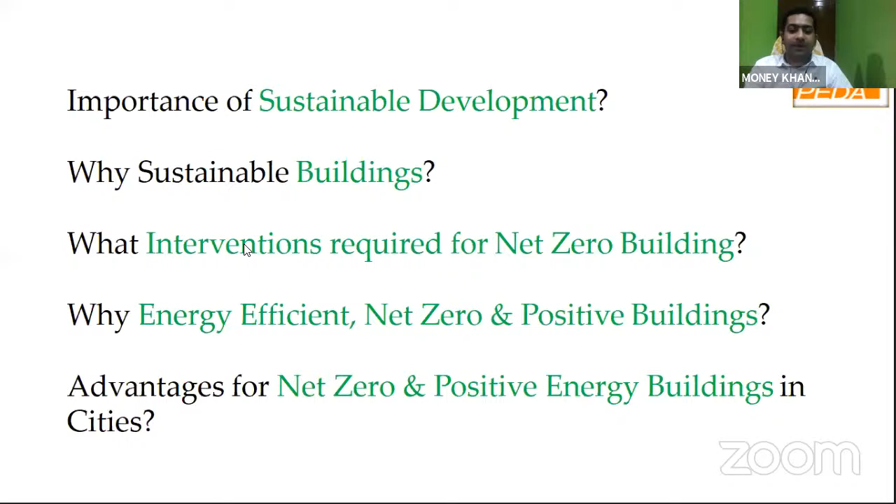So before directly jumping into the topic, I would like to briefly touch upon some facts which we all must be aware of.

So these are some of the facts, the impacts of global warming. We are seeing how the climate is changing, how global warming is impacting and creating impact to the environment. Another is the rising sea level, how coastal flooding is coming up, and the frequent severe storms, especially during summertime, that are impacting our environment.

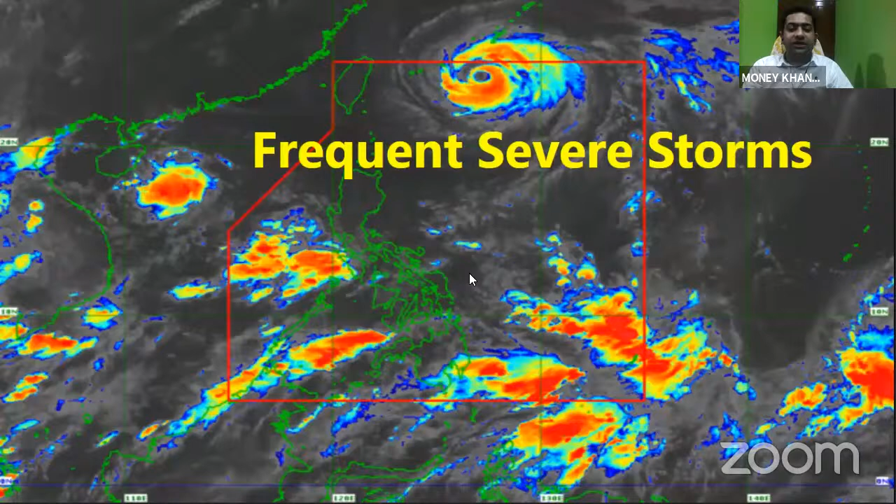Another is the melting glaciers. The glaciers are melting these days, and this is well accepted news which has been floated by many news channels during the winter season, in January or February, where we are seeing the glaciers melting at that time, and how it is very critical and creating impact to the environment.

Another, let me just pinpoint. People are saying your voice is slightly less audible, there is some disturbance, so can you please raise your voice for a while? I am sure that could be right now. Is it correct? Is it audible to you completely now?

Yeah, okay, so basically unprecedented snowfall is another major impact to the environment. In areas where we haven't seen snowfall in the last 10, 5, or 15 years, like in Mussoorie or areas like Kasauli, in the lower part of the area where we haven't seen it, we can see how things are changing and how unprecedented snowfall has occurred in recent times.

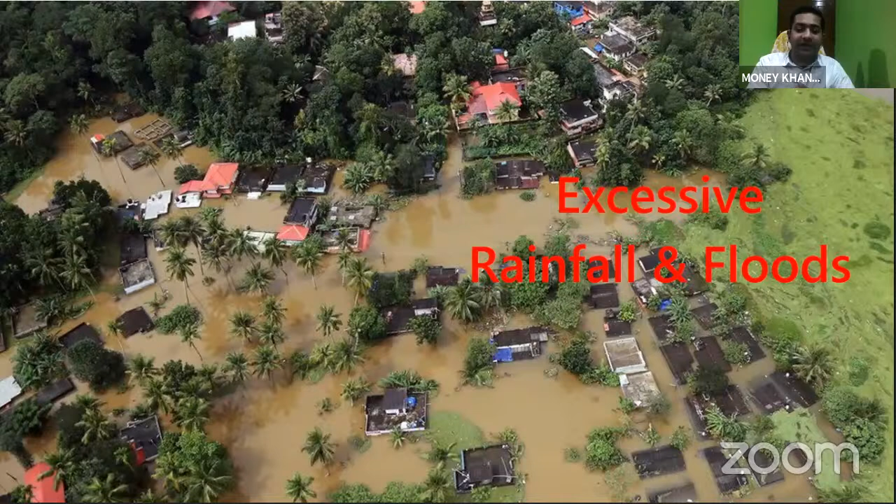Yeah, another is the burning of crops. I'm sure you all have seen the news about the Haryana and Punjab areas, where crops are being burned, and how it's creating a bad impact to the environment.

So another is... there's no voice, so there's a message. I'm sure now the voice is clear. Yeah. Maybe I can switch off the video so that it attaches better.

Okay, so majorly, destructive wildfires as well. This is another situation creating bad impact to the environment, because of what we are doing, what we are destroying - our natural land, natural areas. We are cutting our trees, and creating something bad for the environment.

Another is pollution from thermal power plants. There is another environmental impact, the pollution created by thermal power plants from where power is being generated. We are majorly dependent on these thermal power plants, generating about 70% of all our resources through them.

Another is the burning of waste and crackers. We can see how waste and crackers are burned during the Diwali season. We all know we circulate messages like 'go green, celebrate green Diwali, and no use of crackers' - so this burning of waste and crackers is creating bad impact to the environment.

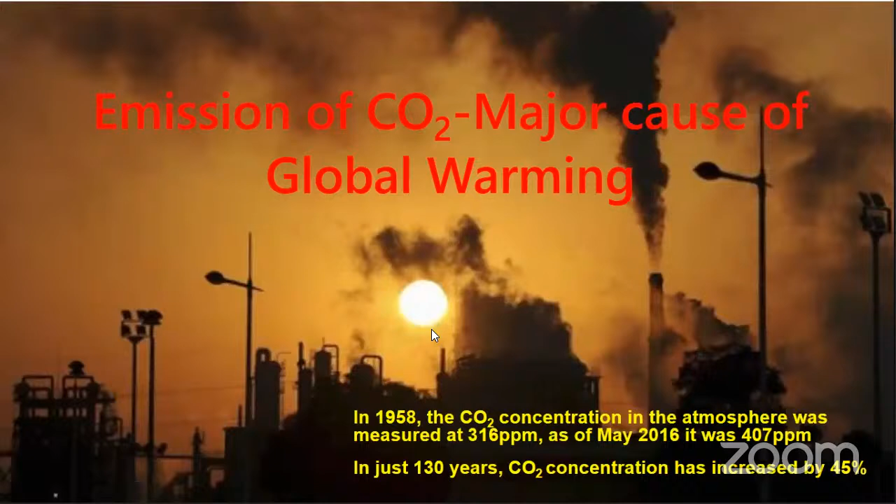Another major challenge these days is air pollution. You can see Kanpur and Delhi among the 15 worst cities in India, and Mumbai being the fourth most polluted mega city. That study considered PM 2.5 and PM 10 levels.

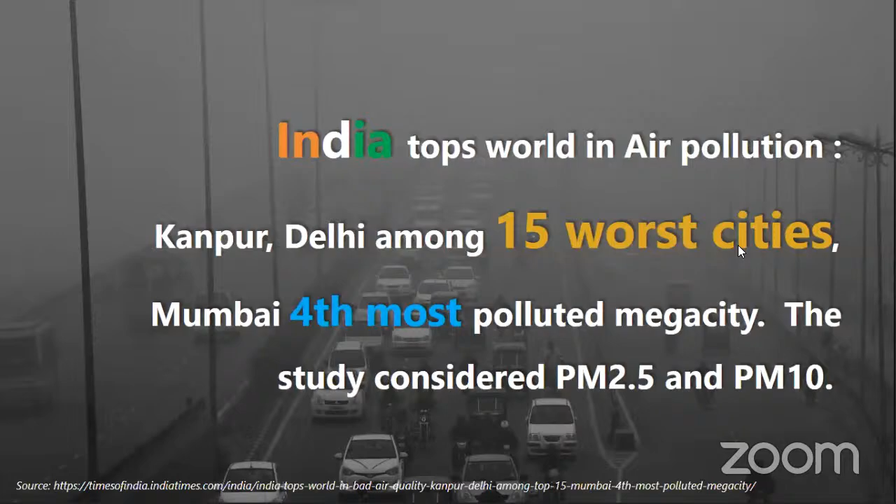So these are the cities - Mumbai being the fourth most polluted, and Delhi among the 15 worst cities in India for top air pollution. This is a study considered by the Times of India.

Another point is the impact of air pollution - you can see one of the metro cities, this example is from Delhi. You can see how the air quality is changing our environment, how we are breathing air that is not being cleaned and not pure in nature.

In the months of November and December, we always hear a buzzword - smog. A few years back, we used to hear about fog only, which as we know is due to the low dew point in the atmosphere. But when smoke and fog combine, that's what we are discussing these days as smog. This is one of the criteria and parameters we are now hearing about, and it's only due to air pollution - majorly from industries, buildings, and transport.

So what is the environmental effect of coronavirus? We are living through this these days, and we can see the great impact coronavirus gave us - what the environment gave to us and how we need to protect it. There is another major question: what is the environment giving to us, and what are we giving back to it? We saw clearer water and cleaner air - these are the environmental effects of the coronavirus. So you can think about this.

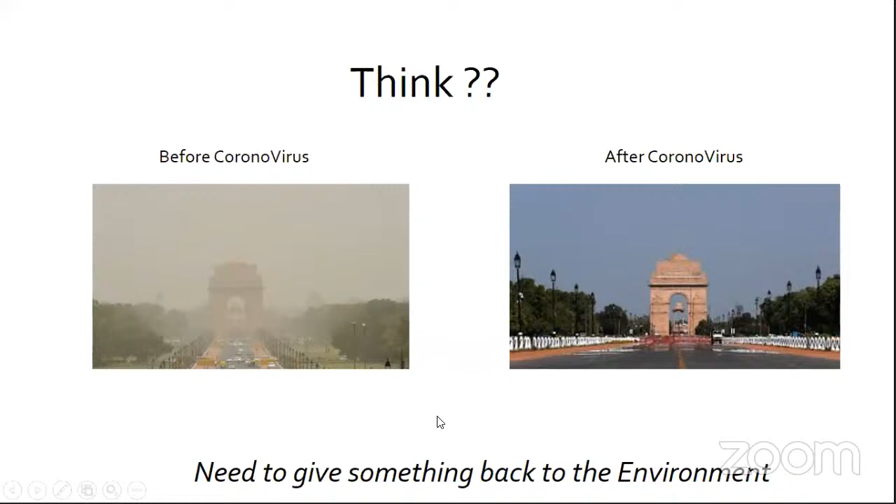There is a question: see the environment around us during this time, how the nature breathes again, how the air quality has improved, how we can breathe the air very easily, very good for our health even. So see the environment around us.

If you compare it with November to March, you can see more than 60-70% air quality improvement in our cities and metro cities. That is a major positive impact. This is a vision to create a peaceful and sustainable earth that will give us strength for the future. That is the vision we need to create.

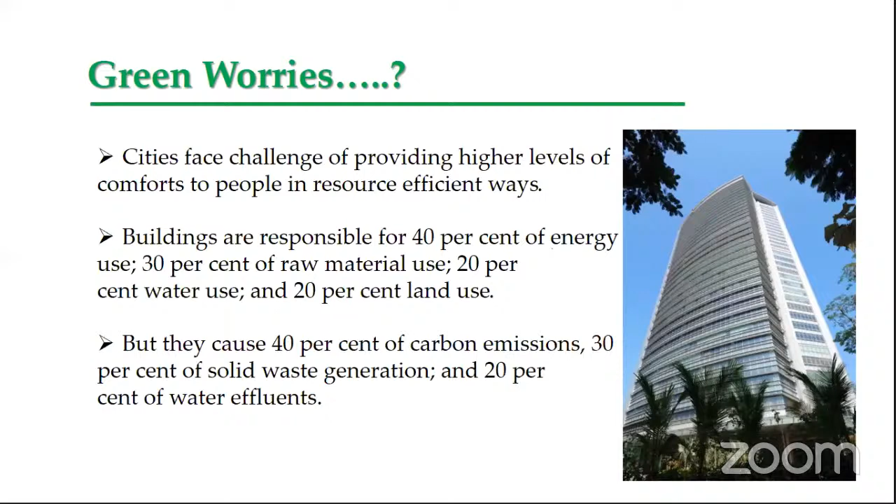Because all buildings are responsible for 40% of carbon emission, please note this: buildings are responsible for 40% of carbon emission, 30% of solid waste generation, and 20% of water effluents. These are the major resources impacted by buildings, and these trends are changing.

First is growth in economy, second is advancement in technology, and third is emerging lifestyle. See how technology is advancing day by day.

You can see this in lighting technology and air conditioners. We were not using air conditioners when there was no such requirement, and even if we had one air conditioner at home, we usually tried to adjust it in just one room.

But as lifestyle changed, we have seen an emerging lifestyle where when we try to sit in a car, we first run the air conditioner and then accelerate the car. This shows our changing lifestyle.

Another major impact has been given by corona. Everyone, even at home, tries to sit and stay in their own individual rooms, so they are more reluctant to use natural ventilation or fresh air, but more adaptable to using air conditioners. This has increased air conditioning demand.

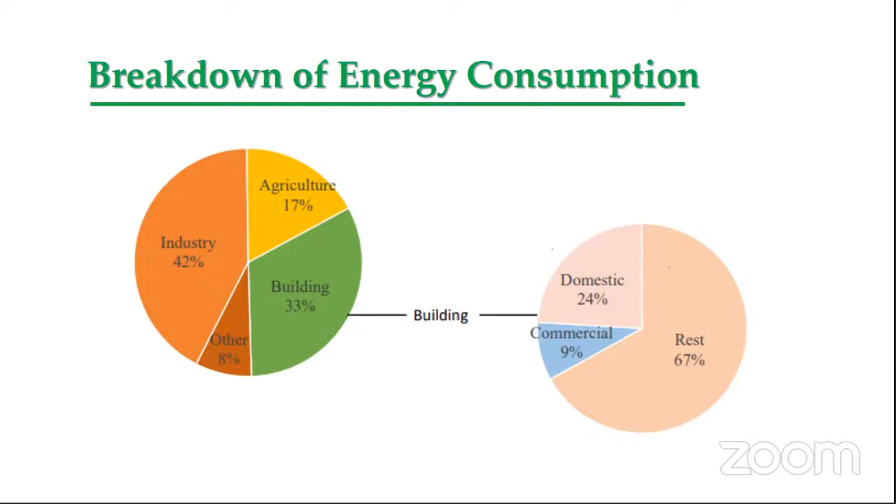So we need to think upon it. You can see here what is the breakdown of energy consumption. Total electricity consumption, out of which 33% is consumed in buildings, out of which 24% is consumed in domestic, and 9% is consumed in the commercial part. So total 33% is consumed in buildings only.

And in the buildings, if you bifurcate all the appliances, you can see lighting consumes 59%. If your building consumes 100 units total, out of which 59 units is the lighting consumption, 31 units is the air conditioning consumption, and 10% is other miscellaneous equipment.

So you can see here commercial buildings like hotels, malls, hospitals, all government buildings, commercial buildings, every such IT building, all such types of buildings are coming up. You can see here in the year 2017, 1.4 billion square meters has been constructed. By 2037, it is going to construct more than that - 39% area is still yet to be constructed.

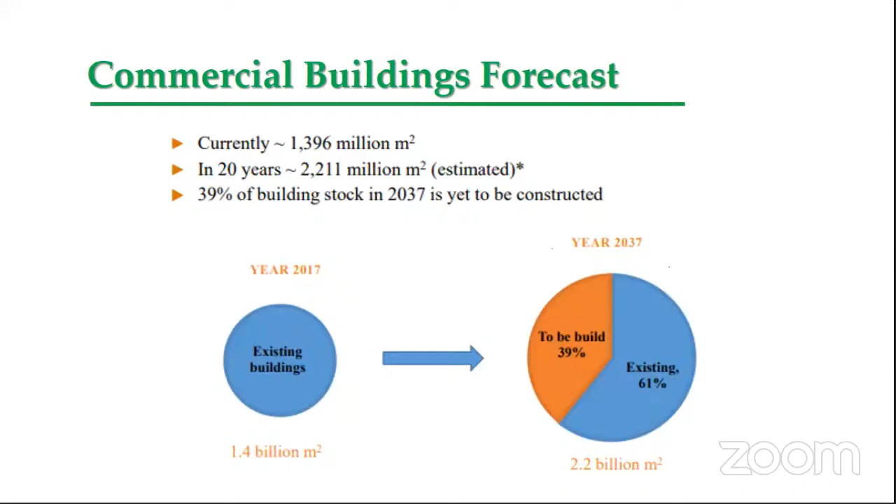It means around 2.2 billion square meters is going to be constructed by the year 2037. So there is a huge demand, huge building sector is coming up, huge commercial buildings are coming up, and India's energy consumption amounts to 1100 billion units of electricity.

1 billion square meters of area is yet to be constructed by 2030 only. So in just 10 years, you can see 1 billion square meters, which is huge. We need to think upon it.

Energy efficient design and construction can save you up to 50% of energy. You will not believe it, I'll show you in my example. So net zero energy buildings, net positive energy buildings are coming up, which is more than 50% energy savings also.

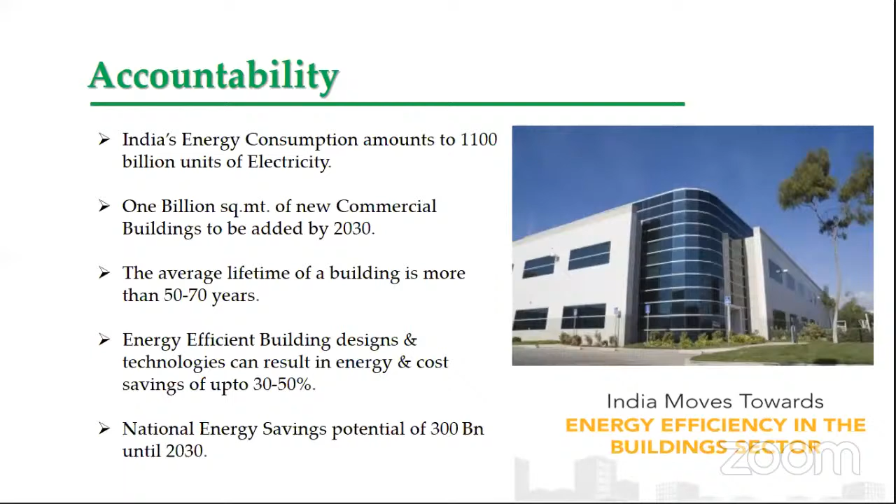Like I'm just starting from ECBC now. ECBC to green buildings, to net zero, and to net positive buildings. So this is the vision for the next upcoming slide.

ECBC, Energy Conservation Building Code, is designed as per the EC Act 2001. There was an EC Act which was developed by Ministry of Power, and this code was launched in May 2007. So you can see more than 13 years have passed since ECBC for commercial buildings came up.

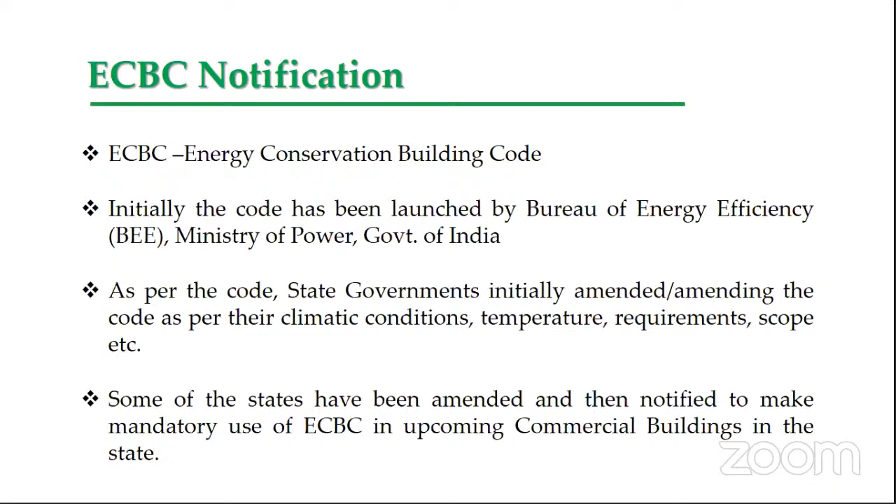ECBC is applicable to all buildings which have a connected load of 100 kilowatts, contract demand of 120 kVA, and conditioned area of 500 square meters. So that is huge. You can see buildings like hotels, hospitals, malls, office buildings, government buildings, private buildings, IT parks, and major multi-family residential buildings.

So there are commercial buildings, office buildings, educational buildings - these are all that I've already discussed, and these all are covered under ECBC. ECBC amended states - more than 20 states where it has been amended.

So you, being an architect and engineer, have heard about the code NBC, National Building Code of India. That is again a voluntary code. It is a big book, like a Granth, where you can see every type of facility like fire, architecture, electrical, green, sustainability, mechanical, plumbing - all such various requirements have been incorporated in one code only. But it is not mandatory.

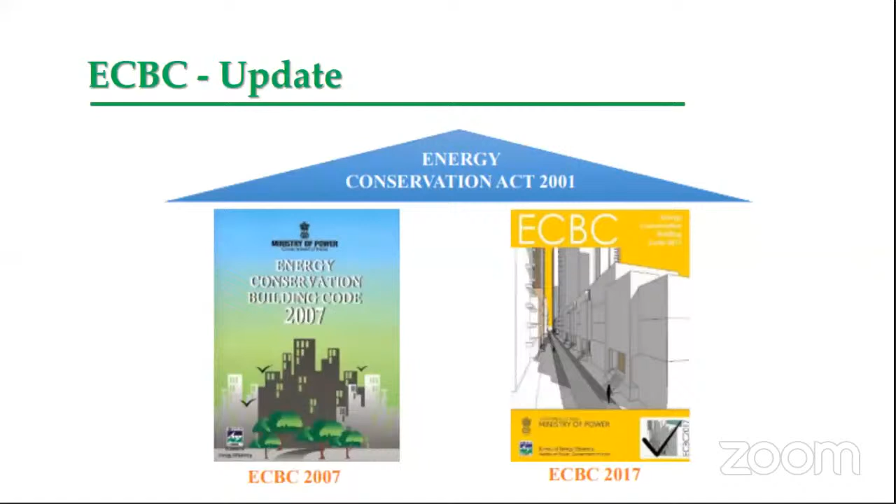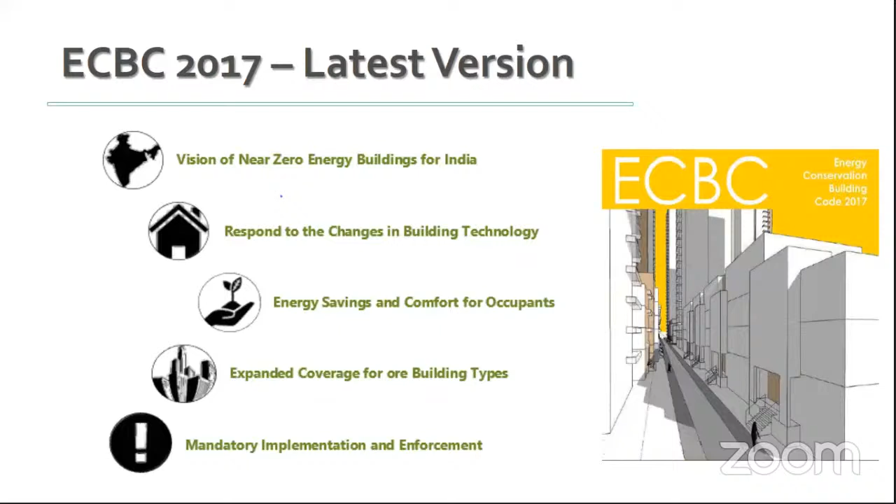When any building plan is to be approved, it will be approved within the purview of the ECBC only. So when ECBC 2007 was launched, again the Ministry of Power, Bureau of Energy Efficiency launched ECBC 2017. That is a vision of creating net zero energy buildings.

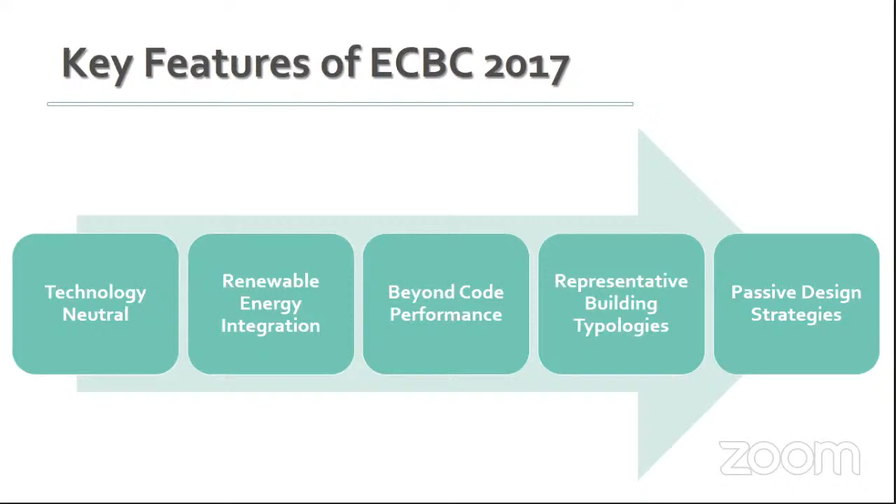ECBC 2017 is a vision towards near zero, responding to changes in building technology, energy saving, and mandatory implementation. You can see here ECBC 2017, the components are building envelope, comfort system, lighting, and electric and renewable. Only four parameters are considered in ECBC 2017 - just four parameters. So these are technology neutral codes, with renewable energy integration. So when the complete energy consumption of your building would be offset by passive design strategies incorporated with renewable and technology advancement integration for your building, that would be ECBC.

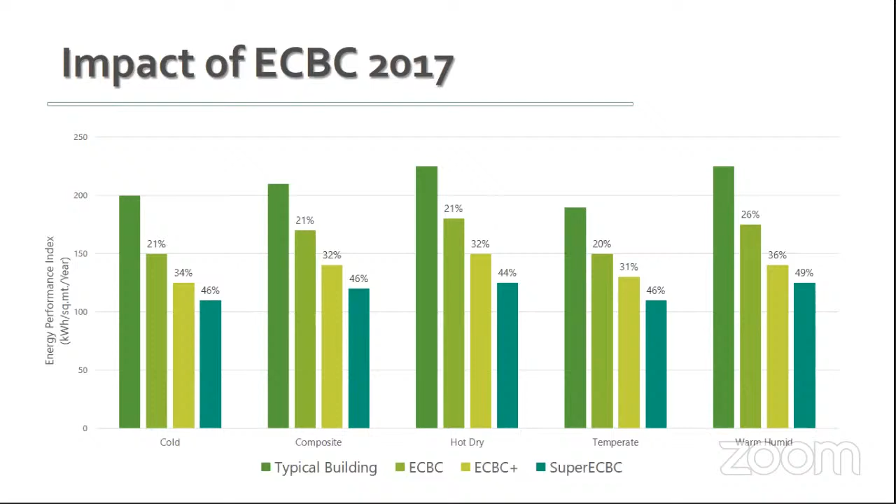What are the impacts of ECBC? It is already divided into three categories. Super ECBC's major target is to create net zero energy buildings. Super ECBC is just equivalent - I'll show you in my upcoming slide. So when you create an ECBC building, you can save up to 30%. With ECBC plus buildings, you can save up to 40%. And you can create energy efficiency of 50% by creating a super ECBC building.

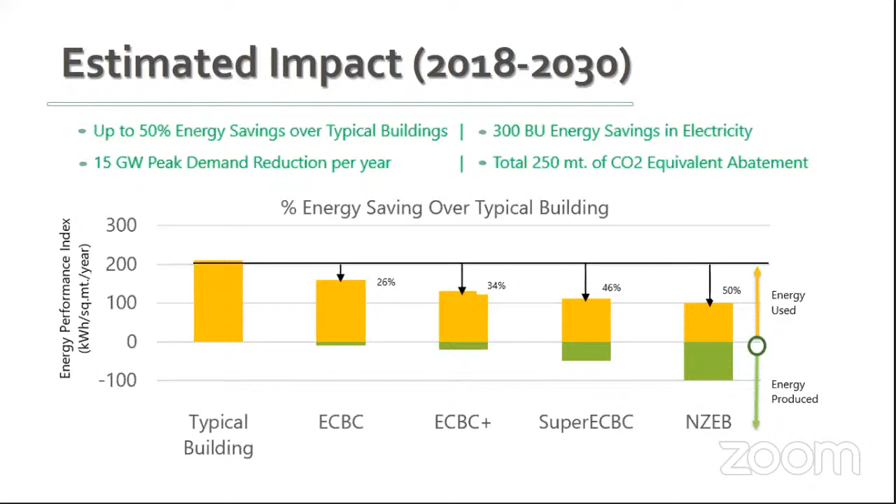And to create 50% and above, when energy used is 50% and energy produced is equivalent to energy used, it is equal to a net zero energy building. So you can see here the vision from ECBC to green to net zero. And here, if the energy used is 100 and energy produced is 102 units, it means your building is net positive. This is how we are going to discuss. ECBC for residential buildings is also coming up.

ECBC residential buildings are also coming, which is creating a huge impact because the major market has 60-70% growth in the residential sector. So this code, the first part of building envelope, was launched in 2018, 14 December 2018, by the Ministry of Power and Bureau of Energy Efficiency. The code name is Eco Niwas Samhita.

That is ECBC residential. So 125 billion units of electricity per year can be saved by 2030.

This is creating a major impact in the building industry. You will not believe how the building sector is increasing. Comparing 2016 with 2031, in just 15 years, residential electricity consumption in buildings is going to increase by more than 4 times, which is huge.

Another topic is the design interventions for net zero to positive buildings. Net zero, positive, ECBC, green, net zero - everything will be covered.

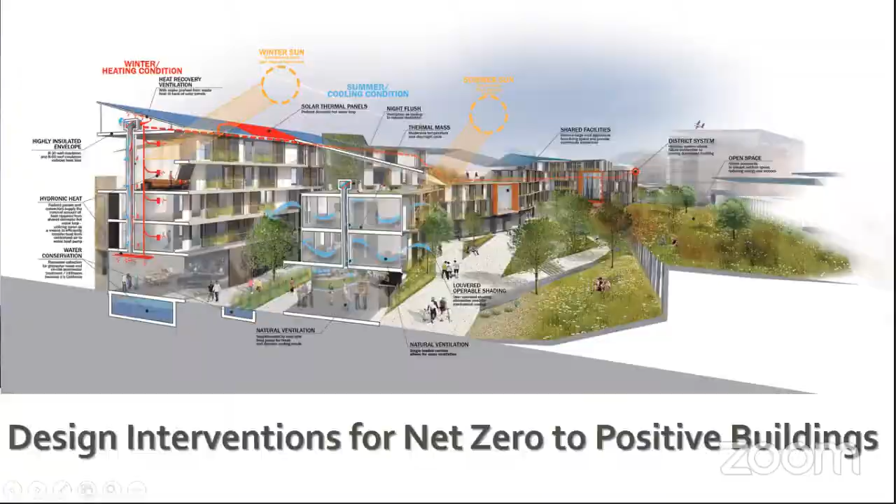The first parameter for comparison is orientation - how you will set your orientation. Then wall assemblies: brick wall, cavity wall, AAC wall, brick wall with insulation, and RCC wall. These are all types of wall assembly, affecting how we construct walls and reduce heat impact on the environment.

Another factor is window size - we need to concentrate on this. We should not construct complete glass buildings, because glass buildings absorb more than 90% of the sun path's heat directly impacting the interior. So we need to have a 40% window wall ratio with proper shading devices, considering window wall ratio and wall/roof assemblies with proper U value.

U value means thermal conductance - how much outside heat is traveling to the interior part. If maximum heat is reduced, then U value is less. The lower the U value, the less hot outside heat will come inside. So we need to have U value as minimum as possible.

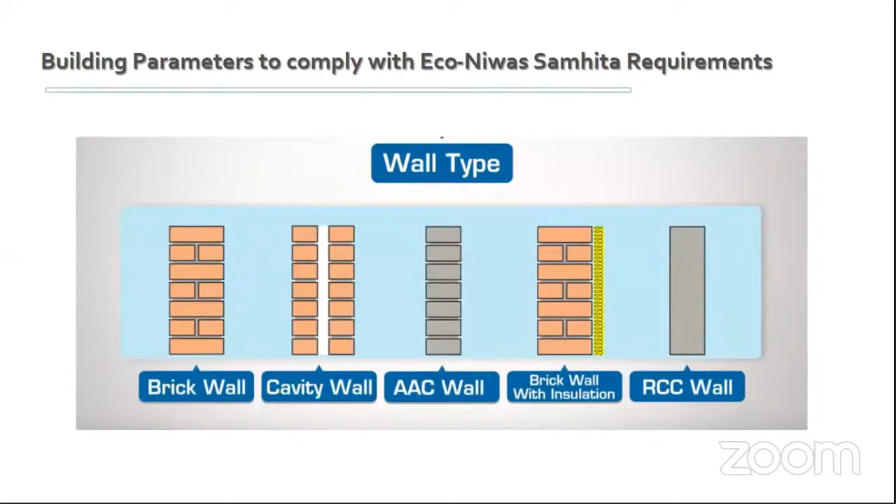So we need to integrate cavity wall, AAC wall, and brick wall with insulation. In addition, we can use glass up to 40% window wall ratio, with certain shading devices.

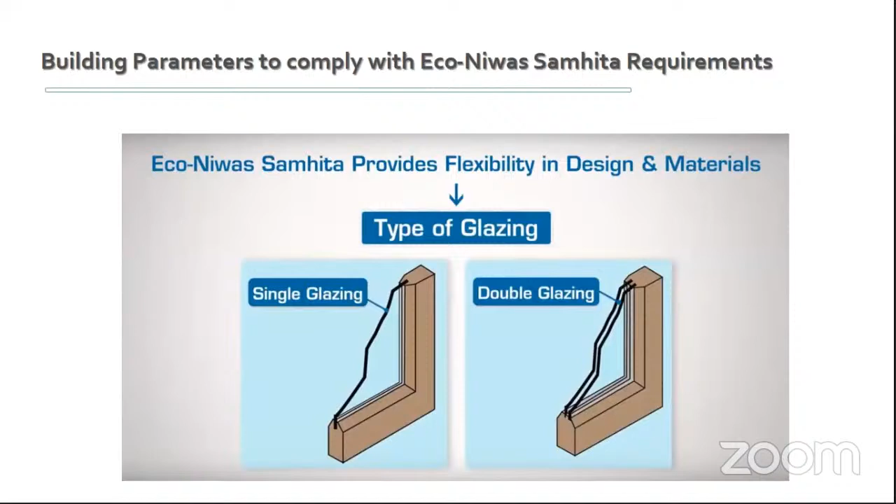In addition, we can use types of glazing, single glaze and double glaze. It is not mandatory to use double glaze - we can even use single glaze with shading devices. If there is no shading, I would directly recommend providing shading devices to the south and west parts, which are the major heat ingress areas.

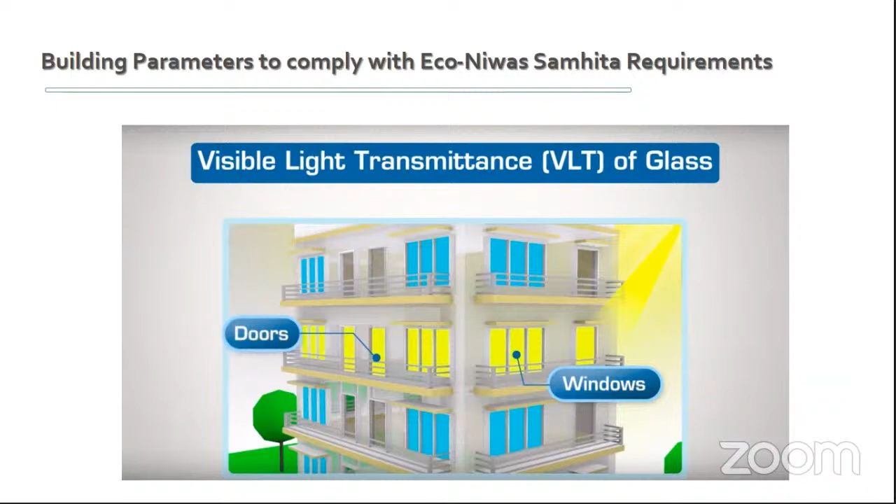Double glazing also reduces and restricts heat entering the interior of our buildings. Another aspect is doors and windows - we need a vision, single glazing or double glazing, chosen such that the VLT, visible light transmittance, captures whatever light is available in the environment through the glass, doors and windows. We need minimum 30% VLT.

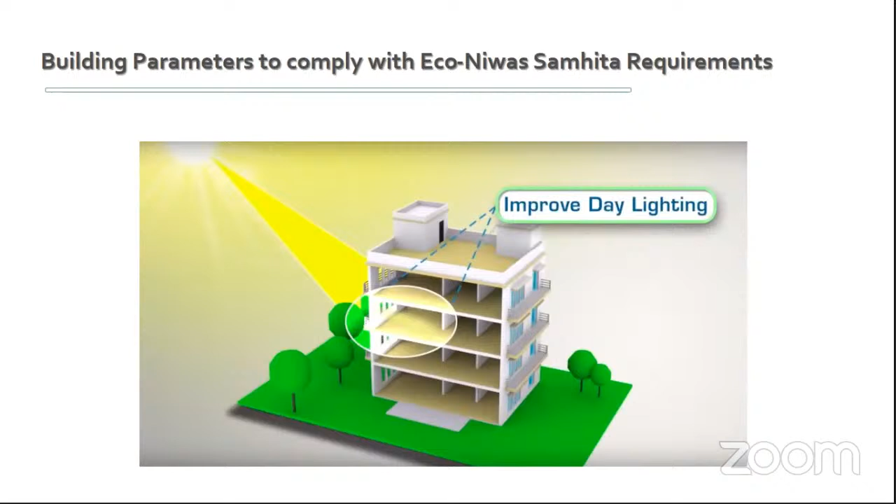Improve daylighting - if we are putting 40% glass, we need to put it at a very logical point, because glass is a major heat intensive area from where direct solar heat gain directly impacts the interior of your building. So improved daylighting means you must have VLT of 30%. You must select glass with good VLT that improves daylighting, like blue glass, green glass, or tinted glass, which also helps improve daylighting.

Another parameter is to improve our thermal comfort conditions. We all know our thermal comfort requirement is 24 to 27 degree Celsius. If the outside air temperature is 45, how do we integrate comfort without air conditioners, and even with air conditioners, how do we set our thermal temperature, how do we allow natural air into the interior of our building, and how do we design our building envelope to improve daylighting and create thermal comfort inside, like improving natural ventilation, which I've already discussed.

Another point: in the summer season limit heat gains, and in the winter season limit heat loss.

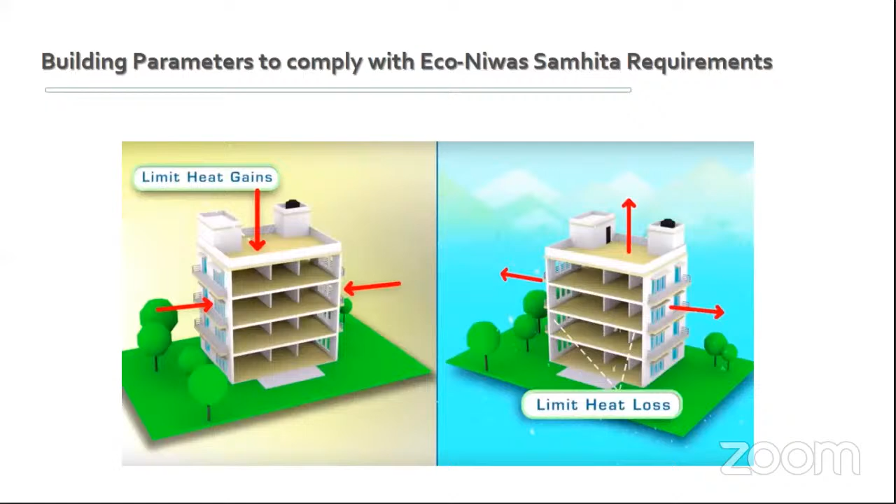In addition, we also need to integrate renewable energy systems - that is a major push. Renewable energy systems also help provide shading to your roof, help generate your electricity, help reduce your connected load, and compensate all your electricity consumption in the building, which would be offset by energy generation from solar panels.

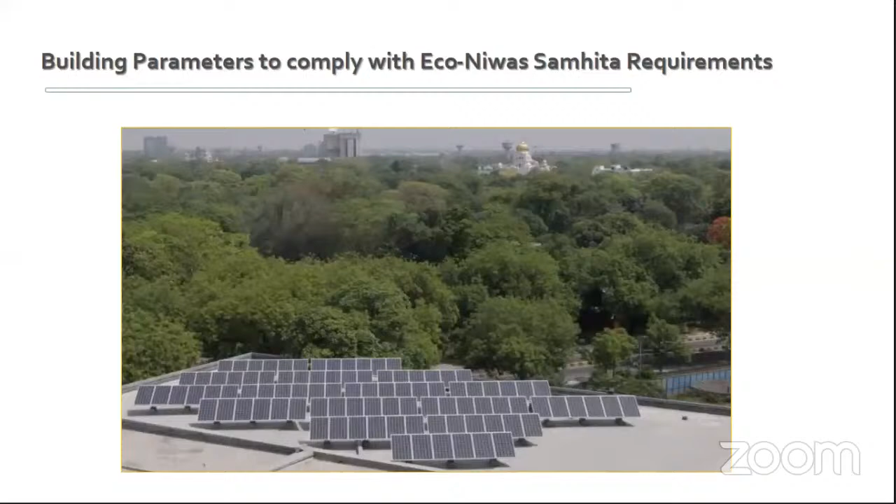So green buildings are ones which provide efficient and economic use of all resources. Designing and constructing buildings with efficient and economic use of all resources is what makes a green building, covering energy, water, materials, human health, and environment for the entire life cycle of the building.

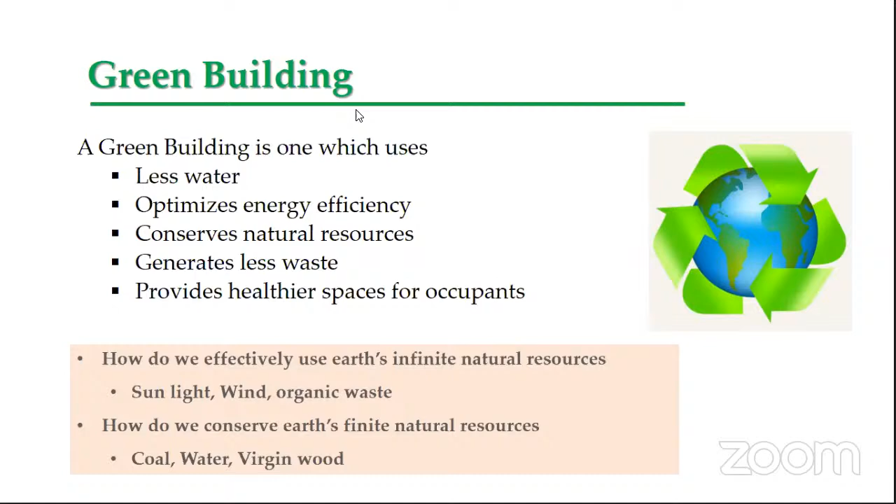Another impact includes environmental benefits, social benefits, and economic benefits. Environmental benefits - improve air quality, improve water quality, reduce water stress, protect biodiversity, conserve natural resources. Social benefits - enhance occupant comfort, improve overall quality of life. And economic benefits...

It will reduce your operational cost, whether in energy, water, waste, or air quality - every type of system used in our building will have reduced costs. And the government is also providing tax incentives and subsidies for the construction of green buildings and renewable energy concepts.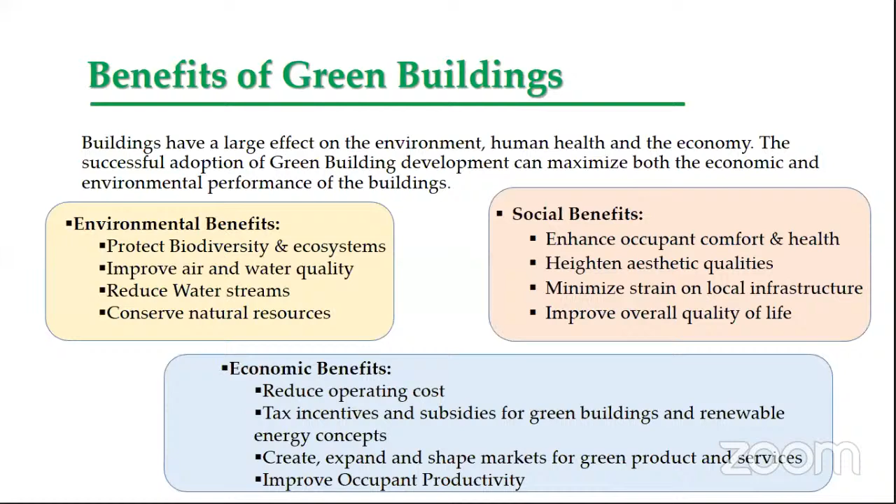A green building is one which has carbon emission reduced by 35%, water use reduced by 40%, energy use reduced by 50%, and solid waste reduced by 70%. Every type of building - homes, facilities, factories, new buildings, healthcare, township, campus, metro, cities - every classification can now be termed a green building.

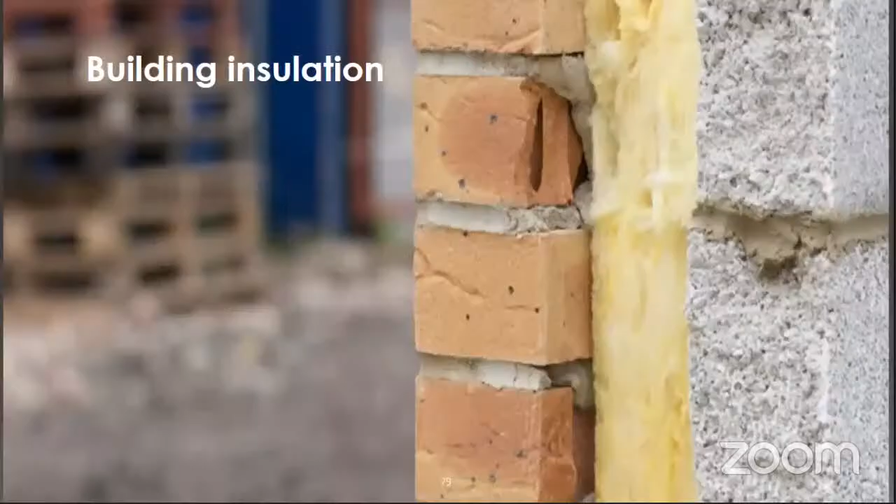There are some recommended building materials I would like to highlight. First is building insulation. Various types of insulation are available, which you can use in walls or roofs, and which can also restrict heat gain to the interior part of your building.

Building insulation has a major impact. There are various types of insulation, and you can see various insulation scenarios here - cavity wall with insulation, cavity wall, and many types of bricks available.

You can see the bricks - red bricks, fly ash bricks, perforated bricks, AAC blocks, hollow blocks, thermal insulated blocks. There are many types of materials available. In addition, various types of insulation: glass wool, rock wool, puff insulation, thermocol, EPS, XPS, styrofoam insulation, puff foam insulation, and puff spray insulation. There are various types of insulation and brick materials which you can use to develop your building assembly and restrict heat from entering inside the building.

If the building has a single wall, it allows more heat to enter inside. When there is a cavity wall, a double wall with insulation, and the thickness is more, there is a lower chance of heat entering inside the building.

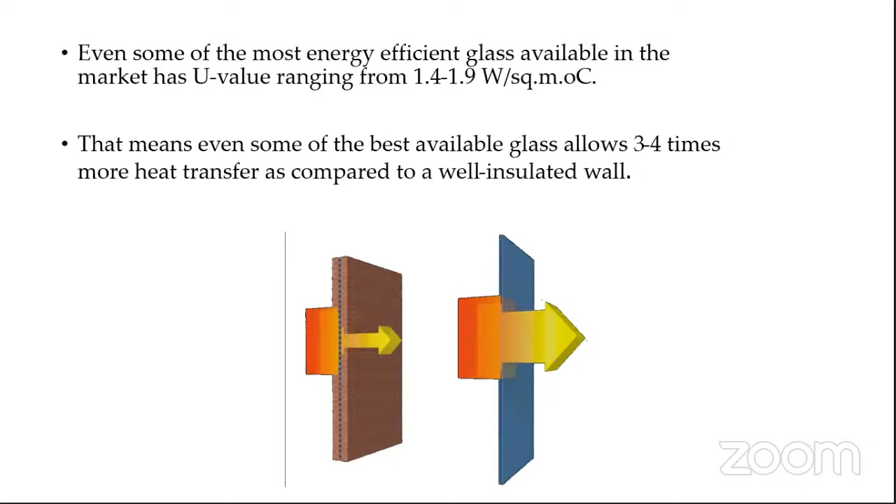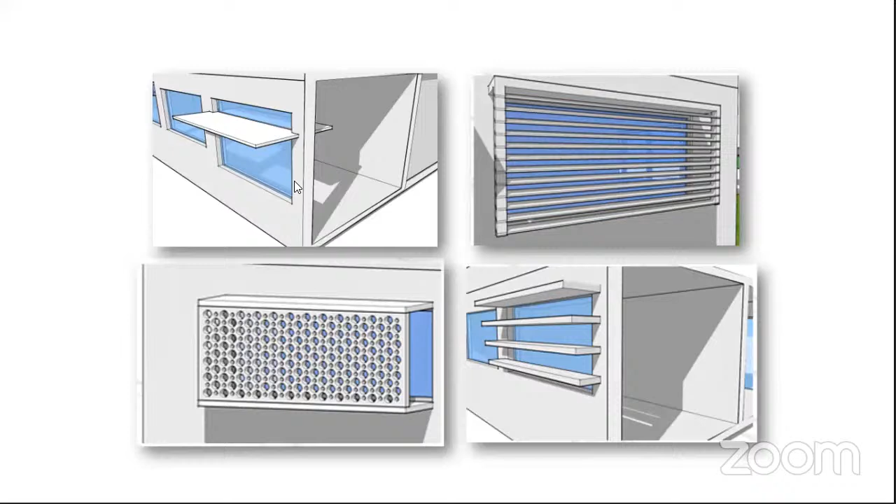There are some shading devices you can see on your screen - horizontal overhangs, vertical fins, and many types of such devices, showing different types of shading devices which can allow natural light to enter inside the building but restrict solar heat gain inside.

Another consideration is the roof - how you are constructing it. In addition to brickbat koba or very conventional practices, you must use buildings which have RCC above and below the deck, and you must have insulation as well.

You can use white tiles or white paint on your roof so that it becomes a cool roof, allowing less solar radiation to enter inside the building, with less impact because when you use white tiles or white paint, more than 90% of the solar radiation will be reflected back to the environment.

These are the glass types: single glaze, double glaze, UPVC frames, high performance single glazing, high performance double glazing, and even triple layer glass is also coming up.

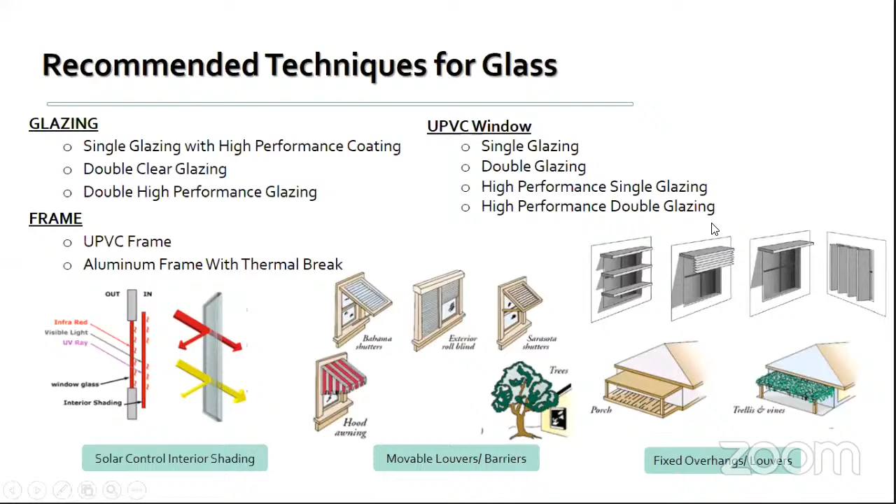You can see movable louvers, barriers, and fixed overhangs. These are major resources we can use logically in this fenestration area, so we can reduce a complete glass building to a more artistic building.

Why do we put complete glass, more than 90%? Simply to give an artistic look, and because the time of construction is less. Fenestration provides light, ventilation, and views, and it must connect with nature, which is also a major requirement to increase productivity.

Glass is used extensively, so we need to reduce it. We need to create buildings so that we can have recessed windows, reduce the use of windows, and create shading devices as well, like such examples.

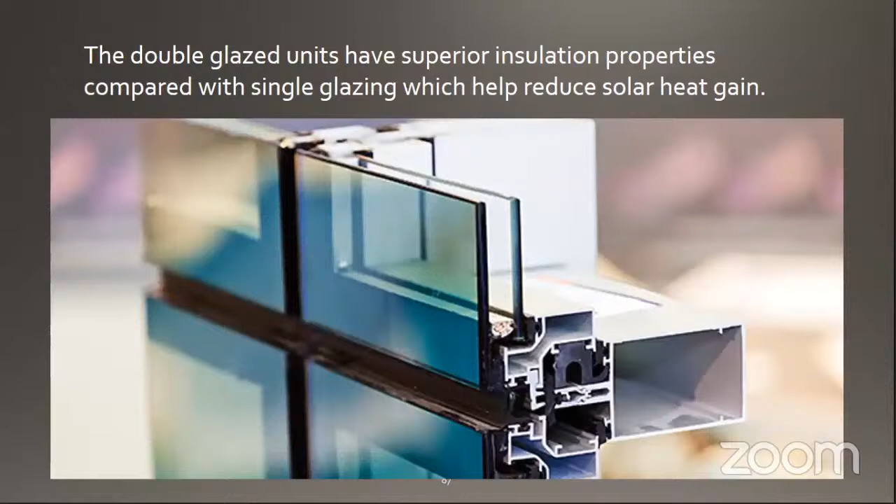With double glaze glass, you can design and construct external shading in your building, such as at the external surface of the wall, with mutual shading over the surfaces, over adjacent floors, and over adjacent areas.

You can have mutual shading, and lighting systems - LED lighting, solar lighting, street lighting - all types of systems integrated with occupancy sensors, motion sensors, and astronomical time switches. There are many types of external lighting resources.

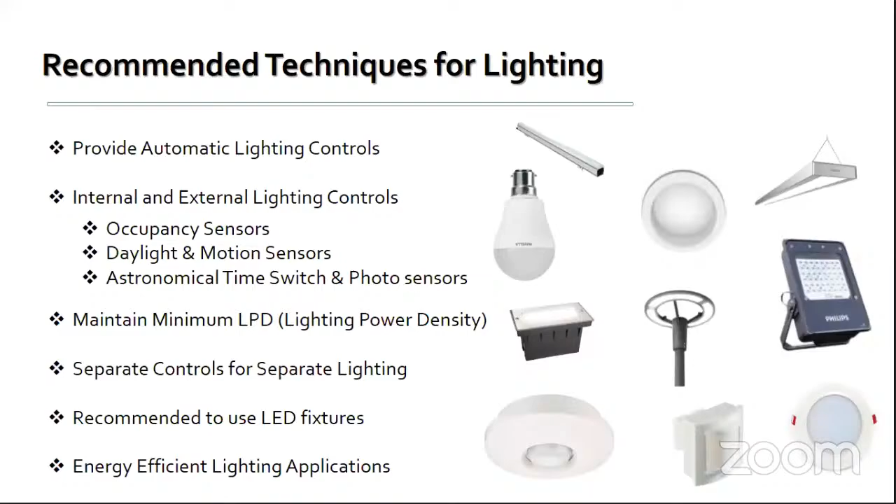We need to integrate LED lighting with all such sensors so that when we enter the room, it will automatically switch on, and when we leave the room, after 30 seconds it will automatically switch off. We need to reduce our heat gain and reduce the use of such buildings.

We can create buildings like this - these are also creative and good artistic buildings. These are also glass, but you can see the exposed glass is only in front of exposed areas.

The areas which are staircases, storerooms, and washrooms - those areas must be exposed in front of the glass. All regularly occupied areas must have glass with a shading device, and it should be an automatic shading device.

When there is a requirement, you can cover it with the shading device. When there is no requirement of shading, you can turn up, you can heighten your operable device, especially during better cloudy conditions when cool air is outside, so you can open your windows and let clean, cool air enter inside the building, completely cooling it.

Another is HVAC technologies, which are also advancing day by day. These are all resources that we need to integrate: VRF chiller, district cooling, radiant cooling system, and geothermal cooling. Radiant and geothermal are known as non-refrigerant types.

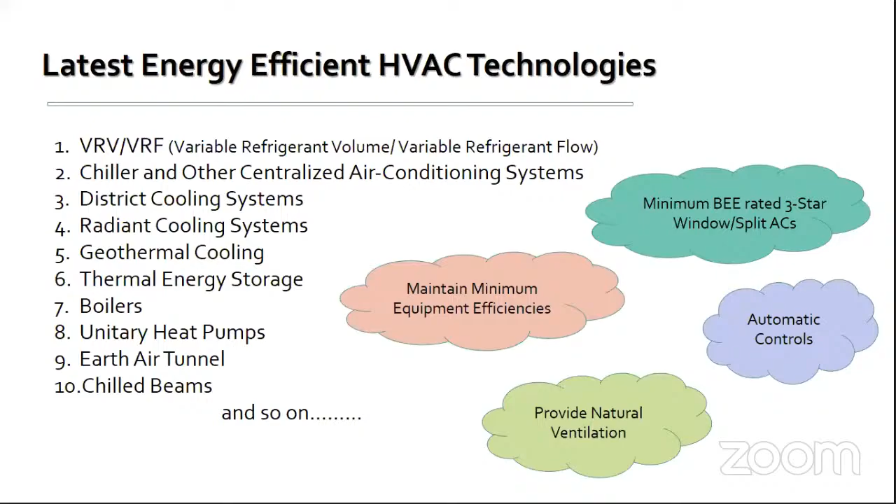ECBC components will help reduce the cooling loads in the building. You can see in the design how natural landscape and trees have been integrated, how the glass portion has been integrated, and natural ventilation, all in such a way that the building consumes less energy, uses natural ventilation, and integrates renewable energy.

I am coming to the next slides, which are net zero to net positive, and renewable energy is the major focus and main requirement. How we need to integrate it, and what is the cost: 1 kilowatt solar PV can be installed on a 100 square feet roof area.

1 kilowatt solar PV installation can be installed, but the area must be unshaded - not shaded by trees, adjacent floors, adjacent areas, or adjacent buildings. For an unshaded 100 square feet area, a 1 kilowatt installation can generate 4 to 5 units of electricity per day - another form of energy generation in your buildings.

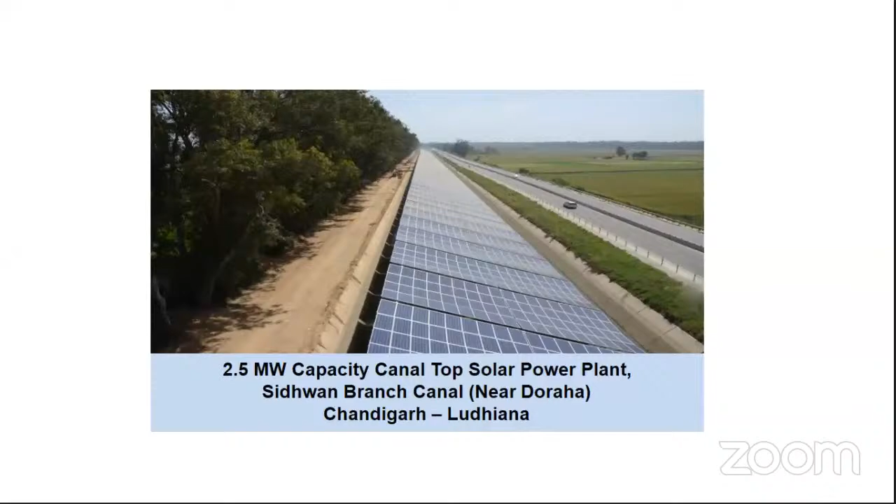So this is another example, the world's largest rooftop at Dera Byas, the Sidhwan canal branch, which has a major 2.5 megawatt capacity canal rooftop installation.

Another is the Parliament House, where it has been installed in a no-shaded area. There were no adjacent buildings, and the trees were very far away from the roof where the solar PV was installed - 80 kilowatt solar PV has been installed at Parliament House, even in India.

Green building rating systems: Griha, GEM, IGBC, and USGBC - four types of rating systems available in India.

Griha is the association of TERI. GEM, run by ASSOCHAM, stands for Green and Eco-Friendly Movement - and this is one of our partners for this webinar as well. GEM provides a rating system from GEM 1 to GEM 5 based on specific requirements - more than 32 requirements, if I'm not wrong - so that your building would be completely GEM certified. Similarly, IGBC and USGBC provide certified silver, gold, and platinum ratings.

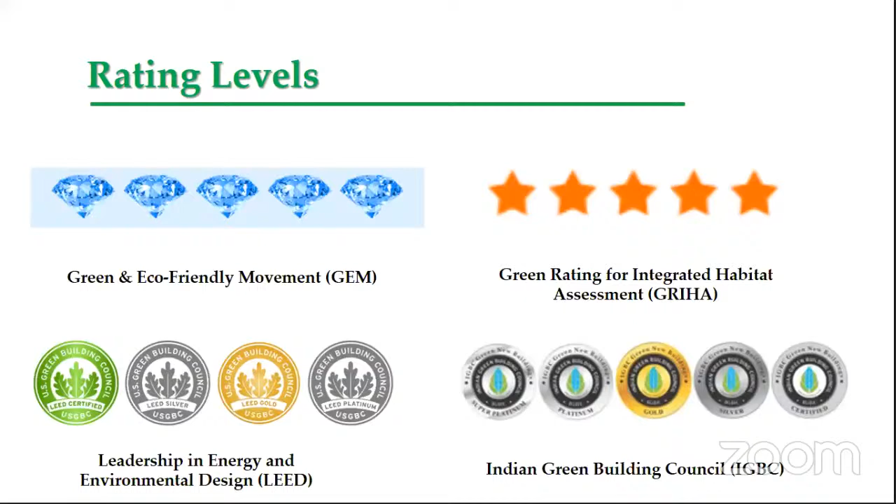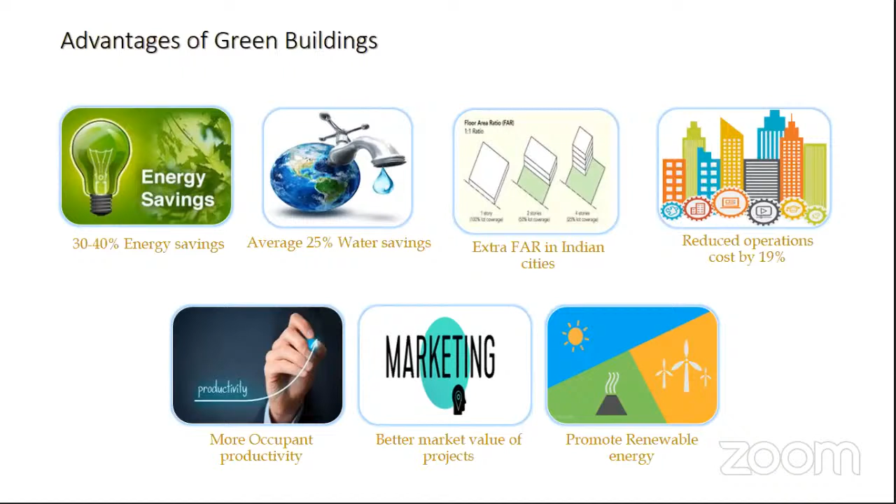So you can create your building as a green building. You can get recognition and achievement, and you can get 5% extra FAR from the government, because the government is also providing incentives and encouraging architects and engineers to design and construct green buildings. This provides 30-40% energy savings, 25% water savings, extra FAR, reduces operational cost by 19%, more occupant productivity, better market value of projects, and promotes renewable energy.

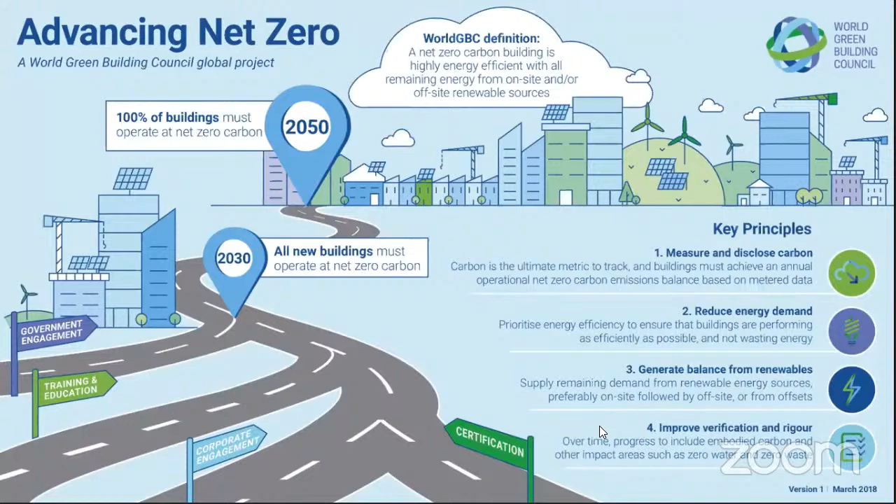So net zero, you can see here - net zero is the concept of a building generating its own energy needs through renewables. Whatever energy is required by the instruments and appliances must be generated by the solar panels.

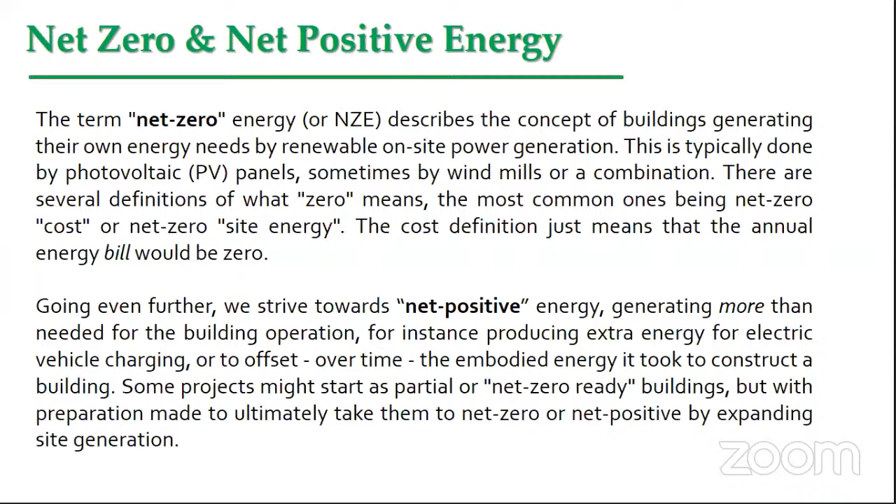This is not only for the solar part, it can be integrated with any renewable system like geothermal, biomass, solar panels, windmills, or hydro, incorporated in the building. If it generates more than required for building operation, it is net positive. If the system's generation equals the energy requirement, it is net zero. If it generates more, it is net positive. These are the simple definitions.

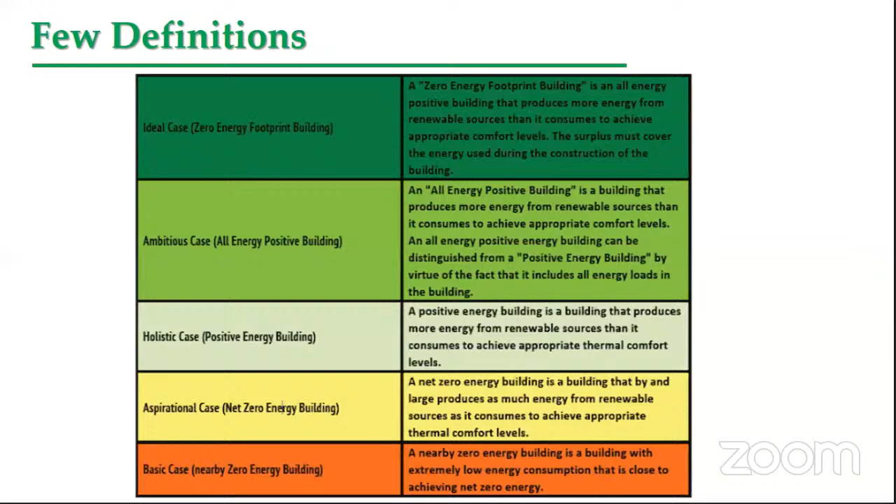Zero energy footprint also includes the carbon footprint. Net positive, as I explained, means that on average over the year, a building produces more energy from renewable sources than it imports from external resources.

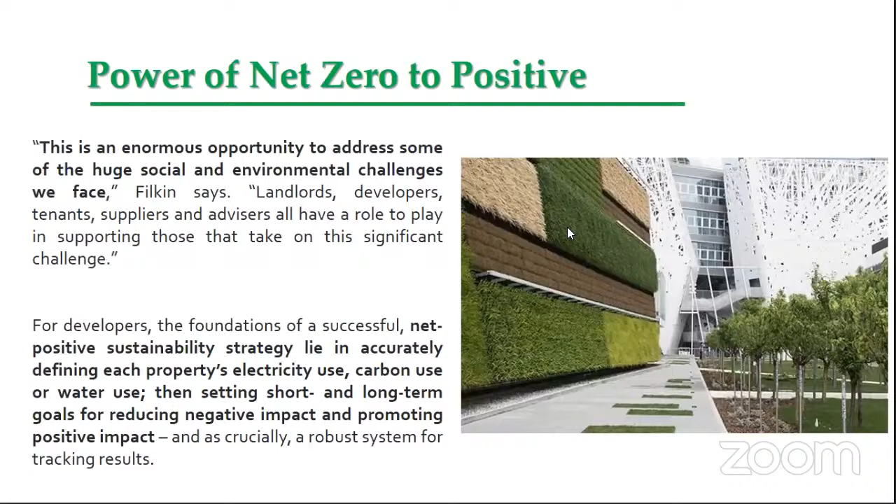You can see here a high performance design and building energy system. Starting from here, they have integrated solar PV panels, an accessible vegetated green roof, and solar shading devices. They have geothermal wells and low energy cooling systems; some floors use radiant cooling systems. They use rain gardens for rainwater capture, reuse, and harvesting, along with an electric vehicle charging station, battery storage systems, and energy recovery and heat capture. All these parameters have been incorporated, and they can also be incorporated into existing buildings to convert them into green buildings, net zero, or net positive buildings.

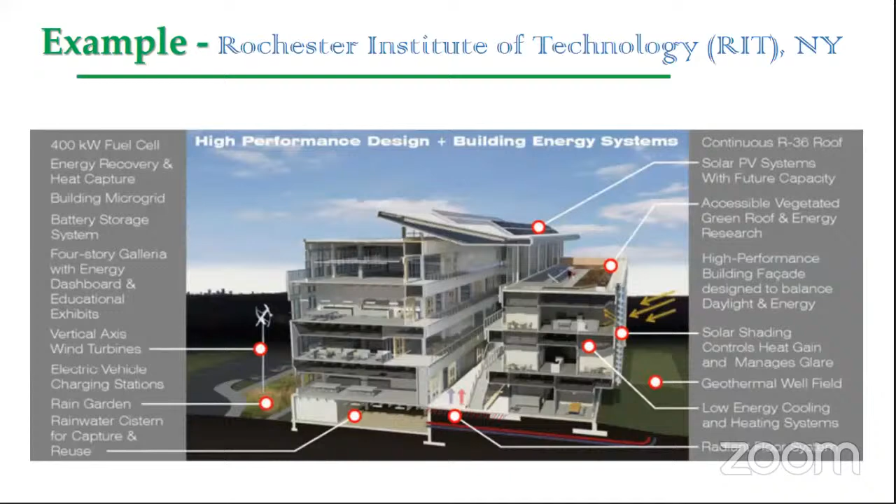Here are some buildings like this: building construction with wall and roof, cavity with insulation, optimum use of double glazed glass with shaded areas, and a complete roof covered with solar panels and a shading device. This building is the Bullitt Center in Seattle, Washington.

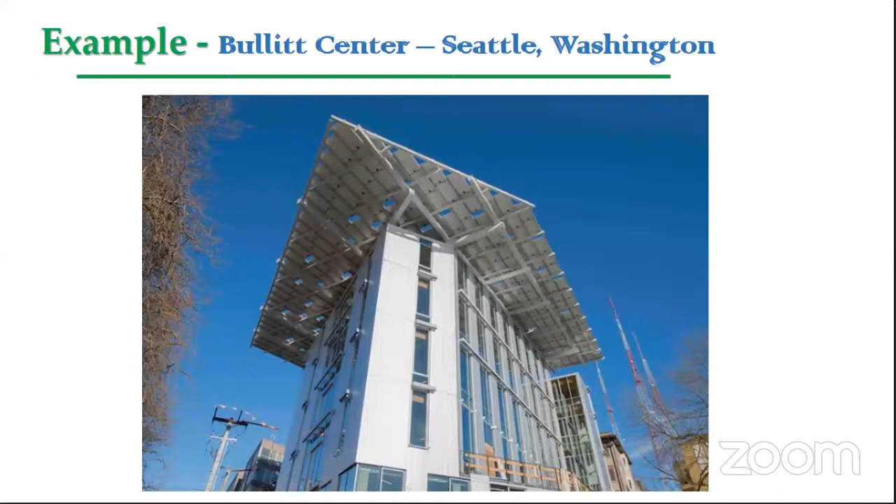They are creating benchmarks, providing support and guidance on how we can create net zero to net positive buildings. Another example, one of the finest world's green buildings, among the top five rated green buildings in the world, is Powerhouse Kjørbo, located in Oslo, Norway.

Now I'd like to show a few climate responsive examples. This is one such example from our climatic condition, human spaces. You can see the dome-based roof, which allows lesser heat to enter, and the design and glass area. Why are we converting such architecture to Western architecture? There are trees around which also provide shading to our spaces.

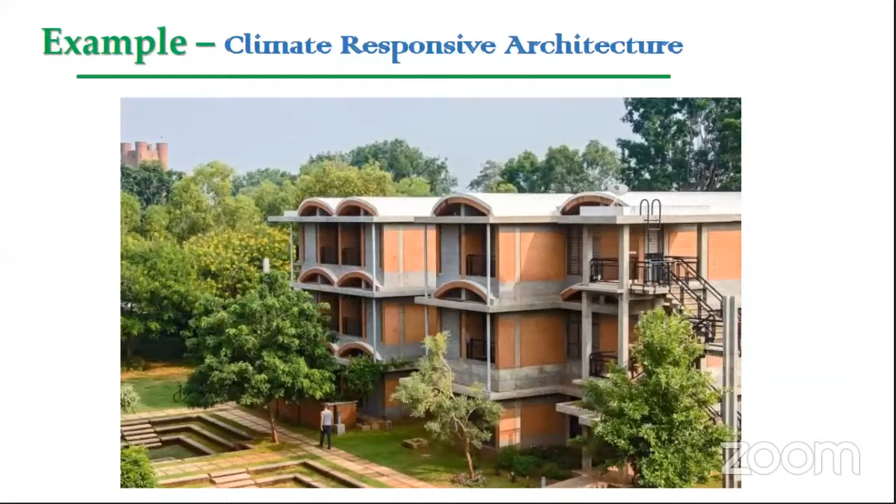These are the open spaces which also provide connection with nature. There is cool, fresh air around, cleaned with the greenery and landscaping part that we need to integrate.

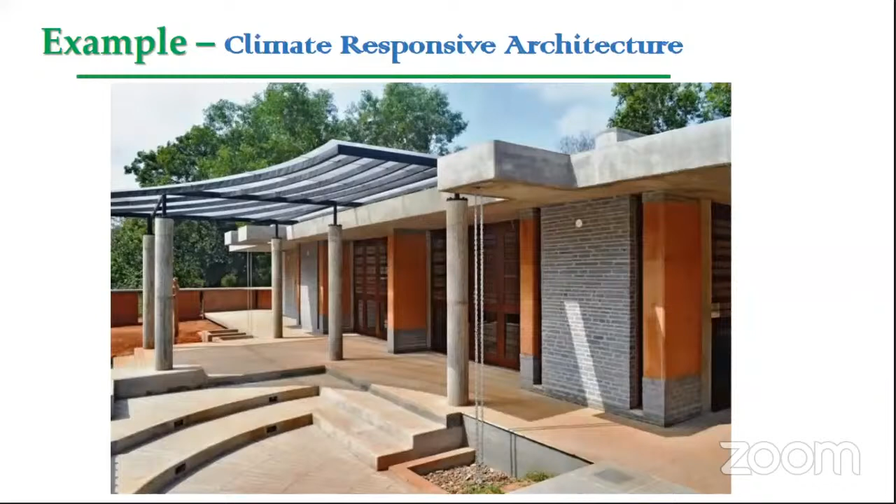Another example I would like to show you is one I touched on when I researched net zero to positive buildings. I came across the National Renewable Energy Laboratory, NREL Research Support Facility, located at Golden, Colorado, USA, which created a benchmark.

I'm sure all of you are aware about NREL, Renewable Energy Laboratory. Their support facility building has been designed and constructed; you can see the artistic view. They have created a sustainable, high performance design, integrating energy efficiency and high performance commercial building parameters. The design and location provide a benchmark.

Why does performance based design build work? Performance based design, performance based building construction, and performance based implementation, as I discussed in the initial slides, encourage innovation. How do you create innovation? What is the faster construction and delivery? What is the better cost control, and how do you establish measurable success criteria?

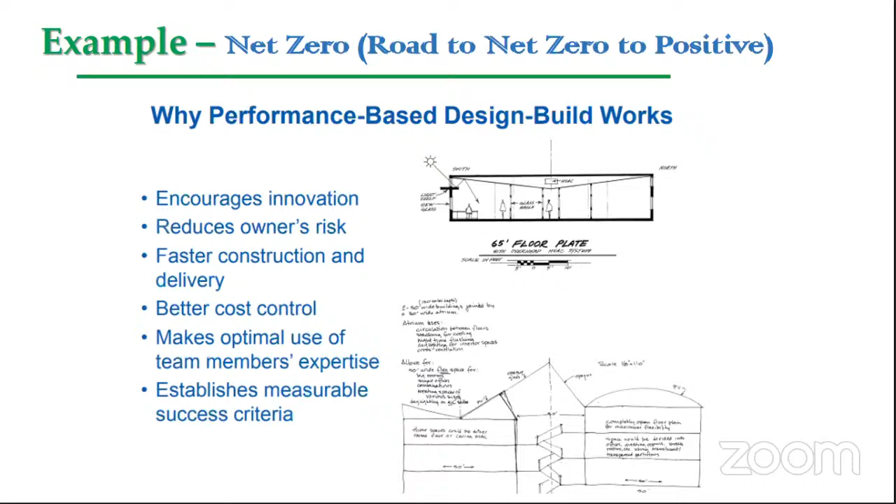Focused on the energy building, which is also a performance based approach. All buildings have not only created the design, but also the life cycle costing of the building. This is one such example of developing a performance based approach.

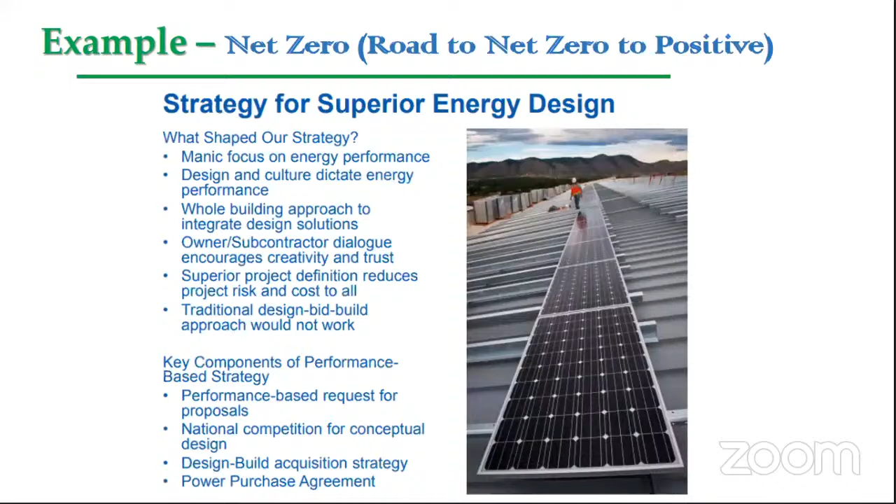So this has completely touched on it. They focused on energy efficiency features, added renewable energy systems in the building, and added energy performance requirements with extensive building energy modeling — the whole building simulation approach covering how you design, how you put the glass, what glass you use, and how much total energy the building will consume.

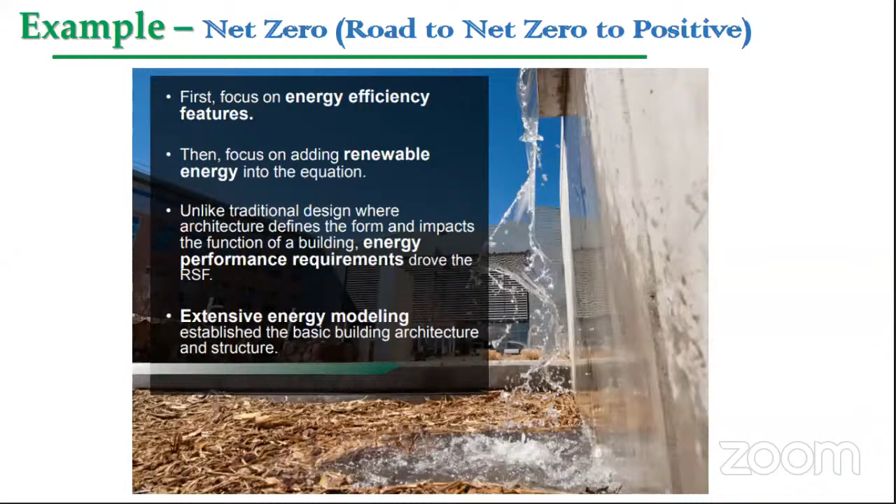Everything was covered at the initial planning and design stage of the building. They created energy modeling and did the energy use breakdown. Major consumption is space heating, because Colorado is one of the coldest areas in the world, requiring space heating, plus data center equipment which needs more air conditioning to operate. So they covered space heating, space cooling, pumps, ventilation fans, domestic hot water, exterior light, and interior light, all respecting lighting, heating, ventilation, domestic hot water, and data center fan and cooling systems.

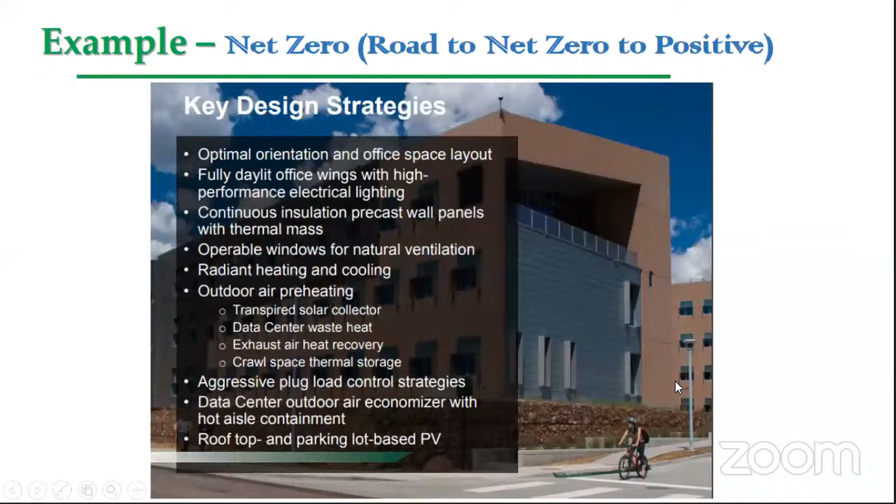Aggressive plug load control strategy and rooftop and parking lot solar based PV systems were incorporated into the building so that it becomes one of the net zero buildings — the vision is to create one of the net zero buildings in the world.

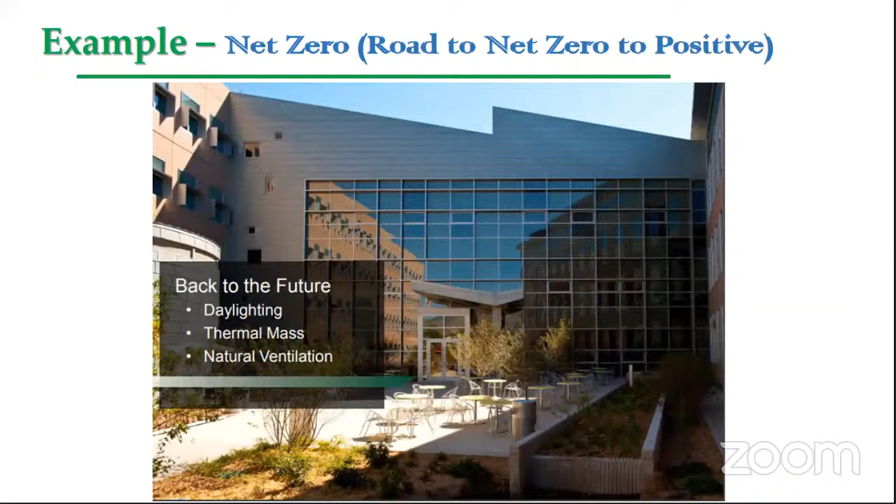This is a complete building where the glass is directly impacting. They have put shading devices, recessed windows, solar panels over the facade, and used daylighting strategies for the building.

These are the fixed louvers they have used so they can capture natural light, but they restrict solar heat gain, limit excess light and glare, and reduce the excessive light coming from outside.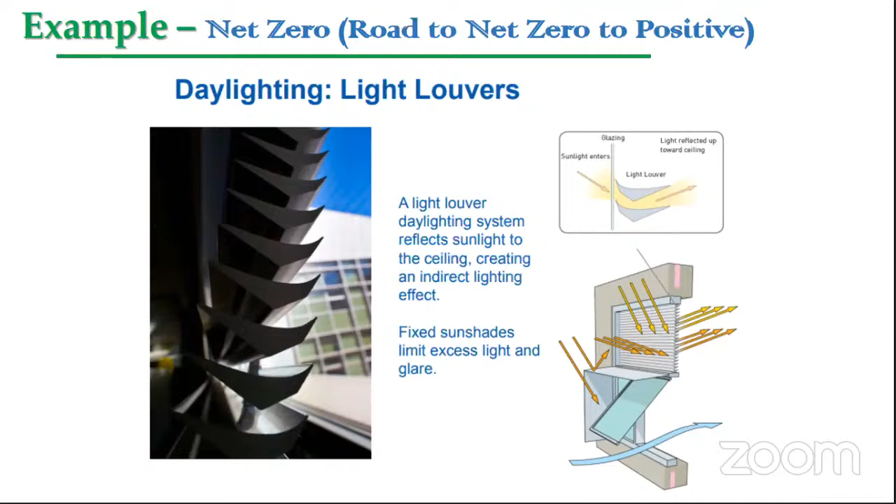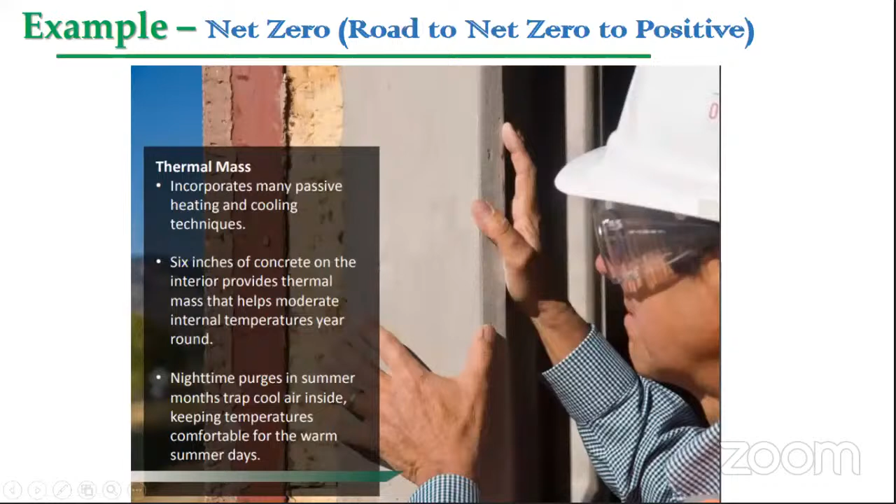You can see the natural ventilation here, with openable windows. You can open the windows and allow fresh, cool air to come inside, so the building is naturally ventilated.

You can see the triple glazed glass with individual overhangs they have used to capture maximum daylight and minimum glare.

This is one such example. It's really amazing from the design and planning stage to construction and implementation - one of the best buildings. You can see the shading facade with solar panels over it.

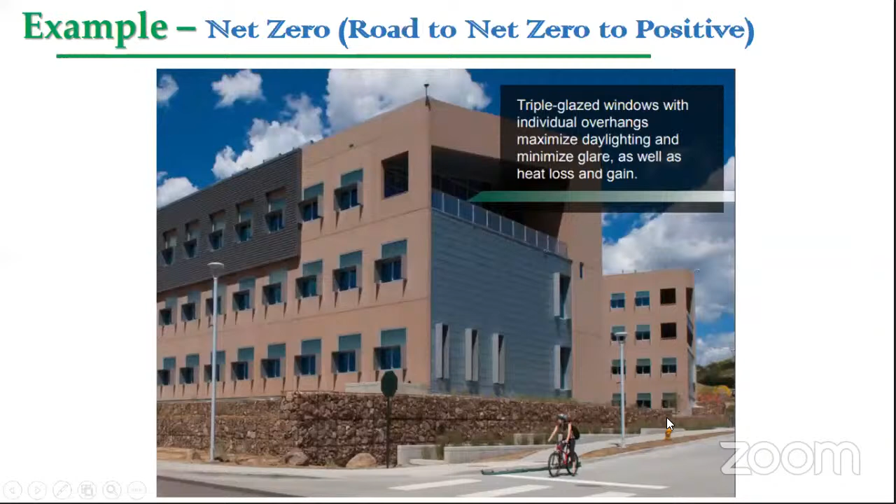Why is energy consumed by the space here? Energy consumed is by the space heating, and energy consumed is by the data center equipment. This is how we are generating the energy.

This is how we are generating the energy, getting solar renewable based systems.

You can see what the electricity consumption was when the building was designed and in planning - it was 3,99,000 in electricity consumption. When it was designed and integrated with solar panels, the total cost of electricity was just 77,263 dollars.

You can compare it, because this is one such example from the USA, and this building's consumption is paid in US dollars. If you design a building like that and integrate it with solar PV, your only electricity cost for a year would be 77,000 rupees, which is an 81% reduction in power requirements.

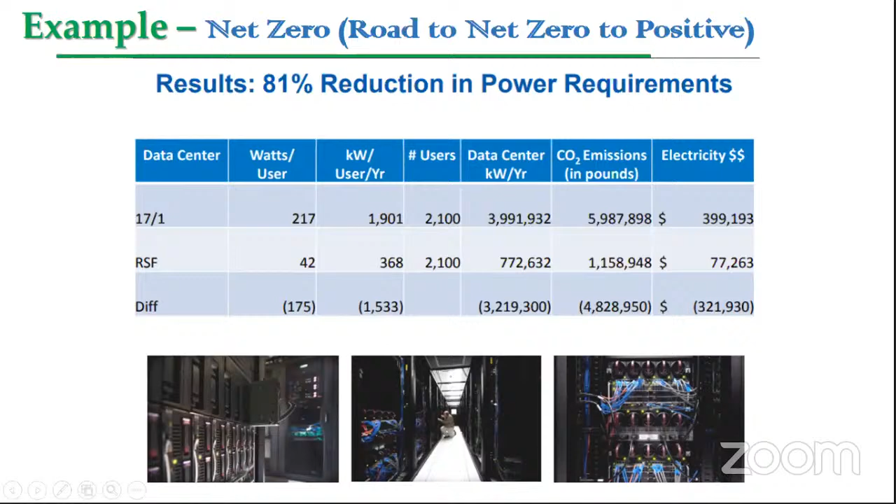So this is one such example - a small building adjacent to the mountains, covered in green. Small improvements, big difference that we see.

Small improvements that create a big difference are also seen in the monitoring part. They track data improving mechanical ventilation, heating, cooling, water use, and energy use - everything is maintained by the metering system they have installed.

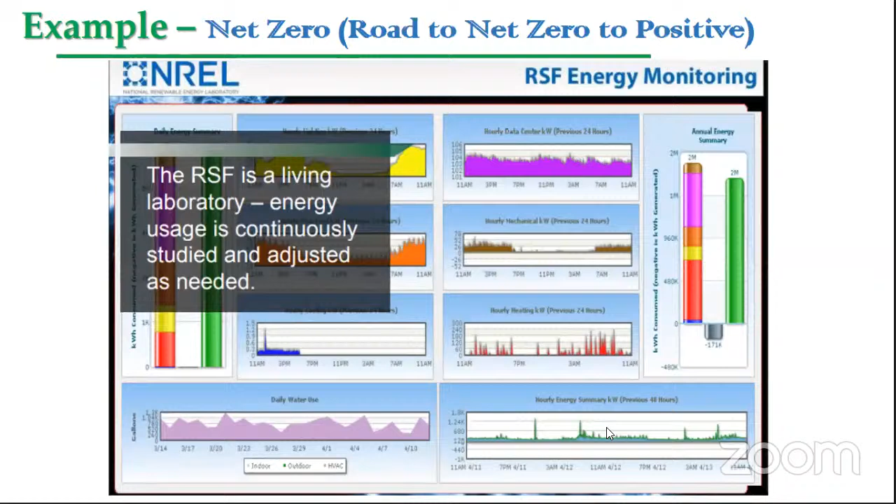Now I would like to show some case studies from India. This is one such example from Jang-e-Azadi, located at Kartarpur, Punjab. This is an architecturally designed building, an educational institute.

The building is very beautifully designed. They have put double glazed glass and cavity wall with insulation.

So this is the Jang-e-Azadi. You can see here how much percentage of energy they have saved - around 50% energy savings. This is one such ECBC compliant building, and it is also a green building.

Another example is Indira Paryavaran Bhavan, located at New Delhi. This is from MOEF, Ministry of Environment and Forest. This building has been designed by an architect from Delhi and constructed by CPWD, Central Public Works Department.

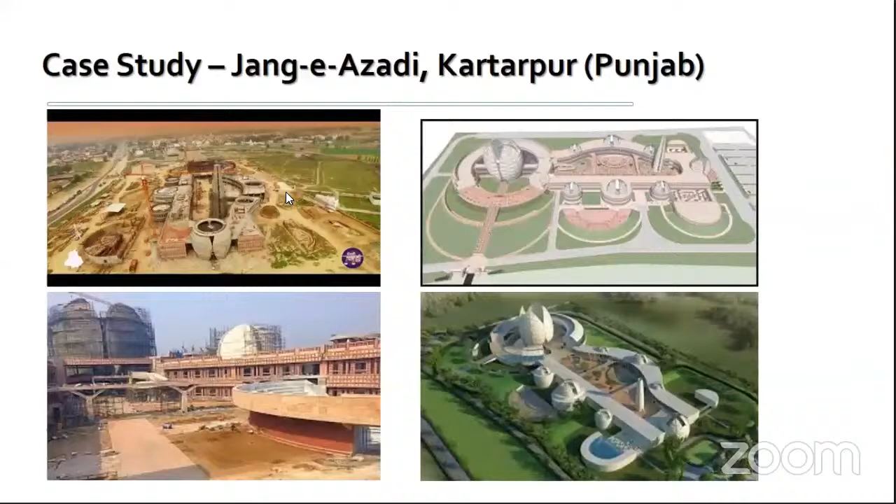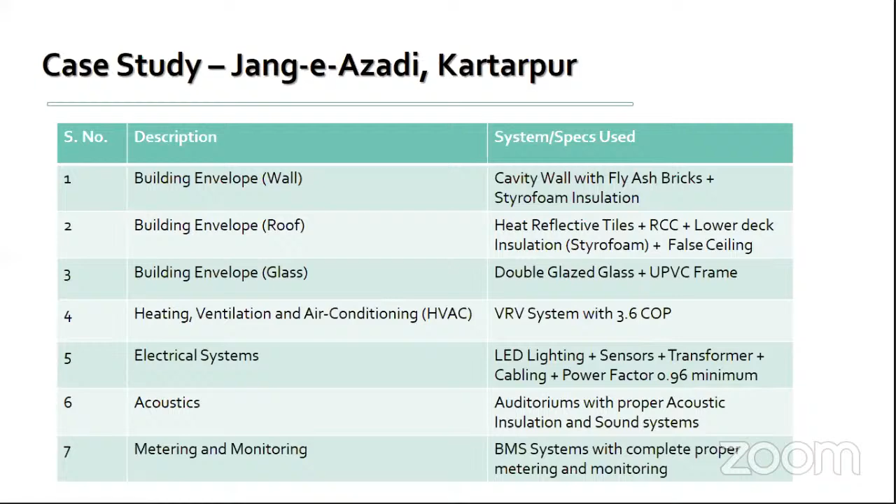You can see here they have designed the building with a cavity wall using fly ash bricks with insulation. For the building envelope roof, they have integrated heat reflective tiles plus RCC plus lower deck insulation, and used a false ceiling. This is from top to bottom - double glazed glass plus UPVC frames, HVAC VRV systems, electrical LED lighting, sensor based systems, transformer 5-star, cabling and power factor 0.96, auditorium with proper acoustics, metering and monitoring BMS based.

This is one such building, the PEDA building, completely using natural resources - natural air, natural sun by using solar PV at the atrium and generating electricity, and natural light captured from the environment - so that they have reduced more than 70% of the air conditioning requirement of the building. All completely based on natural resources.

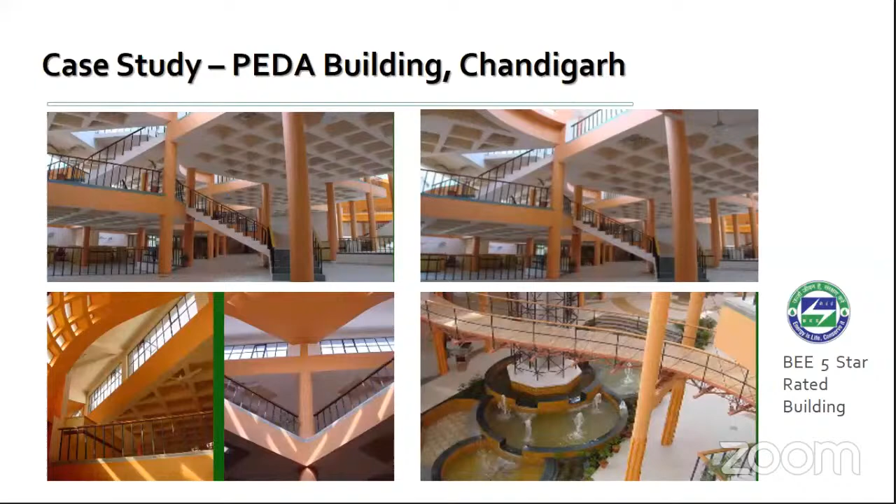This is one such 5-star rated building, the PEDA building. The complete atrium area is covered with misting solutions.

You can see the design here, the outer glass which is double glazed, and the solar PV panels that have been integrated over the roof, and they have used VRV systems. Double cavity wall with insulation using AAC blocks has been used, along with external glass, so that outside solar gain should not directly enter the interior part of the building.

So way forward, these are all examples I have shown you. This is a great vision we all have - towards green, net zero, net positive. Do follow an integrated design approach. The owner, the architects, consultants and implementers shall start implementation from the first day. When you're planning on the first day, you must have a vision, you must have technology integrated.

You must have design integration. Then accordingly the construction will be integrated, and your building would definitely be a sustainable design with integration of renewable energy systems to achieve net zero and net positive energy buildings, which is also climate responsive. This is the futuristic building that we are looking for.

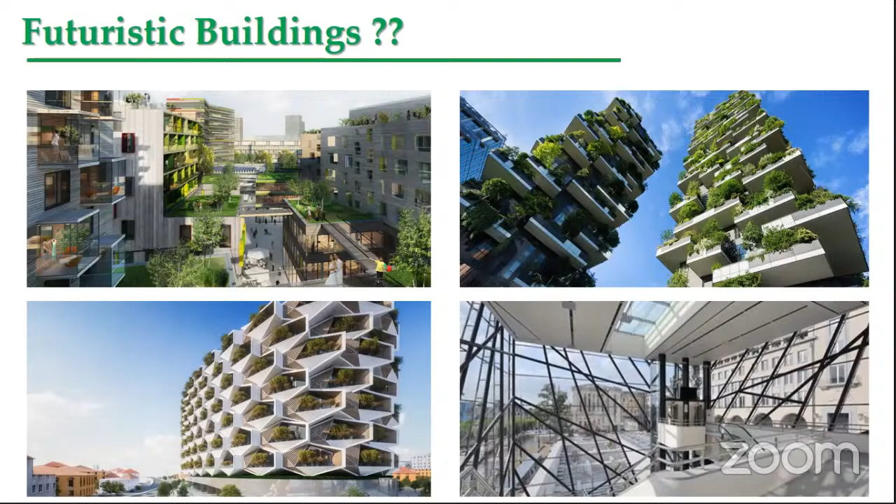These are all such examples where whole communities exist - below there is a mall and above there is a complete community living upon it. Because when everything goes digital, everything is located within 1 kilometer, when all materials of building construction use locally available materials and locally available labor, when the building is constructed in such a way, all of your technology and daily needs would be offset by the building itself. Your design, your integration, all visible light from outside must also be connected with nature, so that your productivity is maximum.

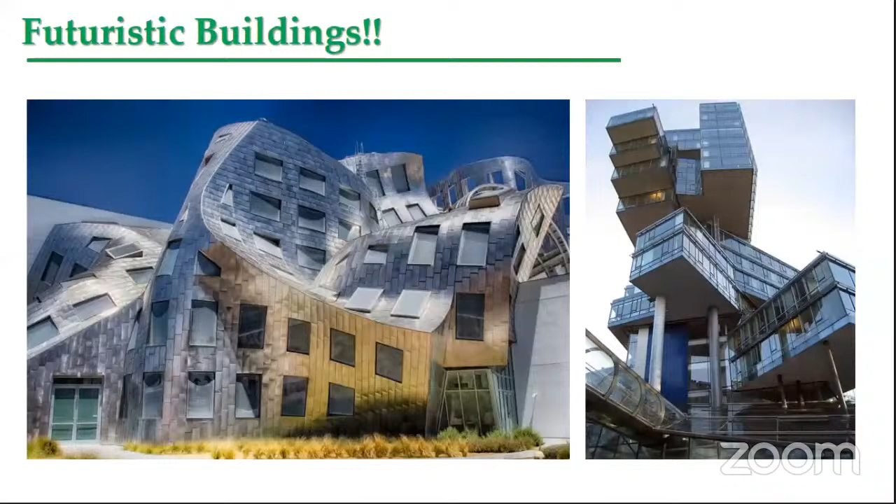These are all such futuristic buildings which can also provide shading, use natural light, use cavity walls - everything they are using to provide shading to the part below.

Also, let's learn from the past - like Hawa Mahal, Taj Mahal, and the Charminar at Hyderabad. Every historical monument was designed and constructed in such a way 100 years ago, that even today, if you go to these places, you will feel comfortable even without air conditioning. You will see the technology that was integrated 150, 100 years back, and how it can be incorporated in our buildings so that we can build a more sustainable built environment. The objective is to save our planet and create more energy efficient and green buildings.

Summer season is coming up, and it is a running campaign by the Ministry of Power to set AC at 24 degrees, so that your room temperature must be in thermal comfort requirement, not chilled condition temperature. At 24 degrees room temperature, you can save energy, and even by 1 degree rise up to 24, you save about 6% in electricity for every 1 degree rise.

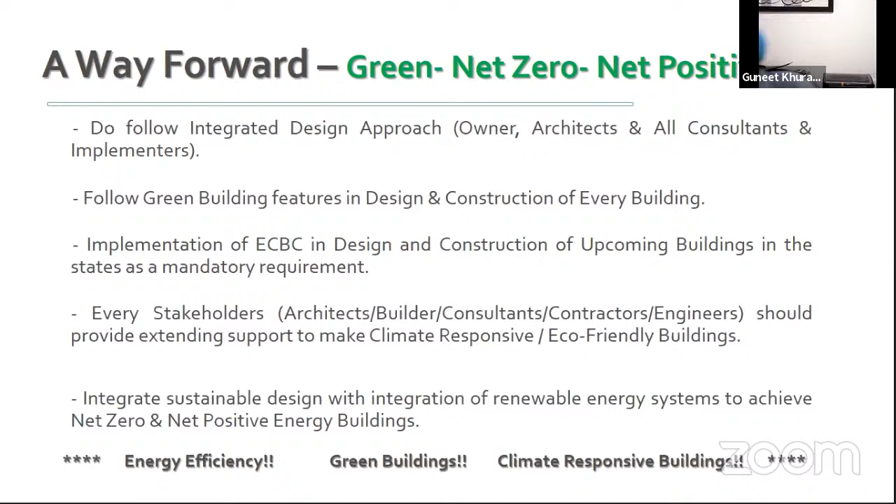But now what you have to do - when you sit together, you as an architect, we being the consultant and another being the contractors, when we all sit together on the table, we'll exchange ideas on what we can do here. We need to install 2 more floors now, fourth floor and fifth floor.

For the fourth floor we'll complete it like that. We have completed 3 floors.